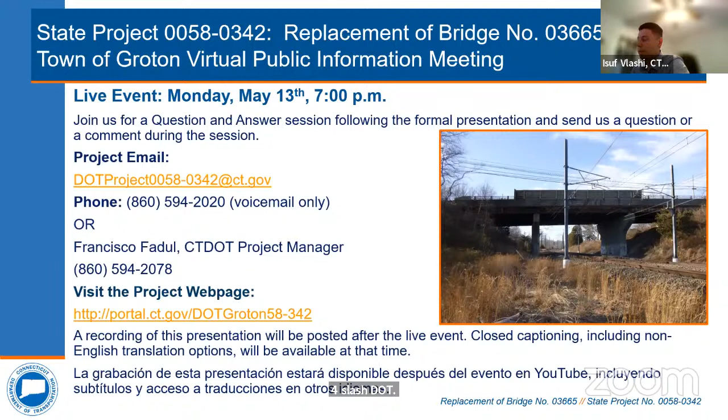Here we have the project team on the Connecticut Department of Transportation end. We have Bart Sweeney, the Division Chief of Bridges. We have Derek Lessard, the Principal Engineer, Consultant Bridge Design. Myself, Isuf Vlashi, the Project Engineer and Consultant Bridge Design, along with Francisco Fadul, Project Manager for the project and Consultant Bridge Design.

Here we have the Consultant Liaison Engineering team, along with the Designer of Record, WSP. For the CLE team, Rich Armstrong is the program manager over at GM2. Dennis Garceau is a project manager at GM2. Tom Wiley-Burt is the project director over at WSP, and Jodi Constant is the project manager over at WSP.

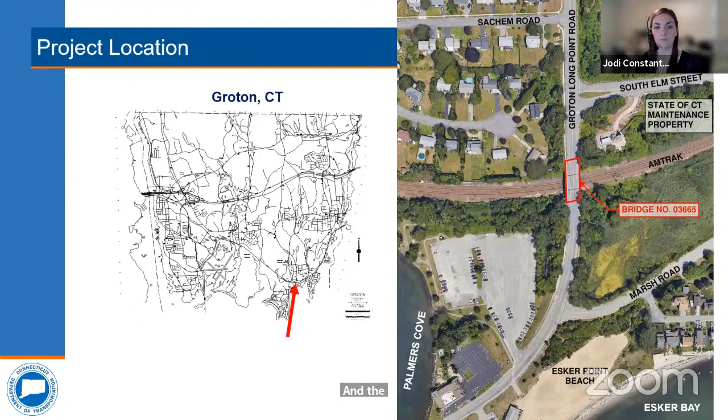Before we get into the details of the current conditions of the bridge, I want to quickly review some bridge terminology that's going to be used throughout the presentation.

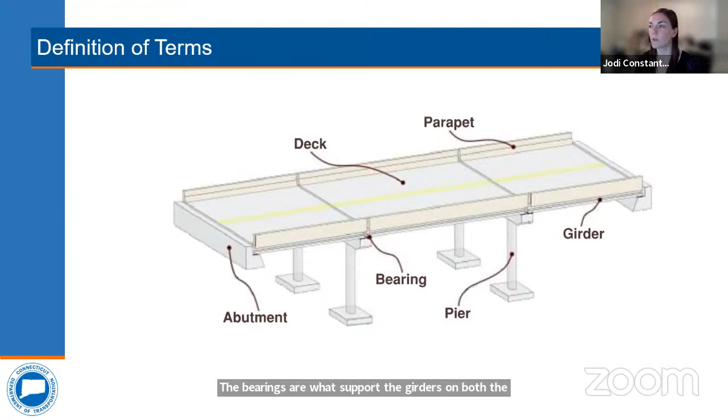The bearings are what support the girders on both the abutments and the piers. And then finally, the parapet is the concrete barrier that you typically see on the bridge.

The purpose of this project is to address the structural deficiencies of Bridge 3665. We have reviewed routine inspection reports over the last few years on this structure, as well as completed a site visit.

This confirmed all of these areas of deterioration. There are currently low condition ratings for the deck, the steel girders, and the bearings.

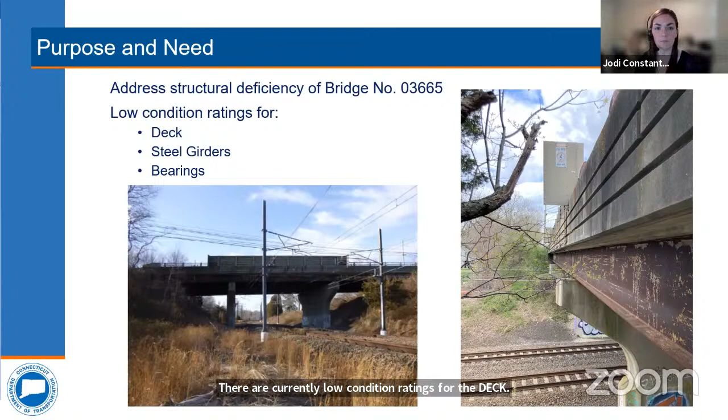So any repairs at this location are going to be invasive to the rail line below. It's going to require coordination with Amtrak and track outages to perform any construction over or adjacent to the tracks.

With that in mind, and considering the high level of deterioration observed on the bridge, a full bridge replacement was selected to address these structural deficiencies.

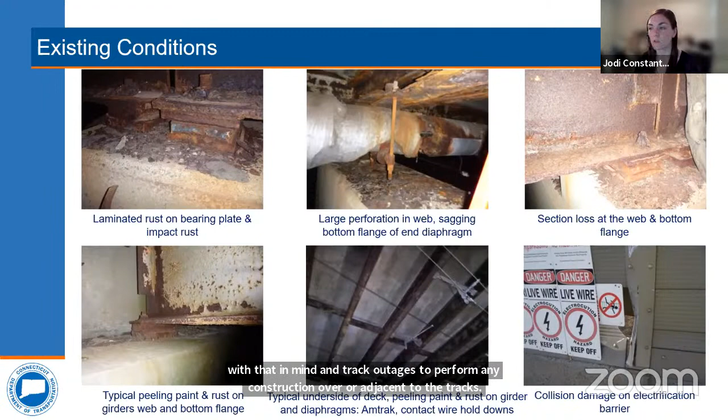Furthermore, as a result of CTDOT's Complete Streets Directive, which includes a focus on pedestrian and bicycle mobility, pavement markings are going to be added to Groton Long Point Road for an extended limit.

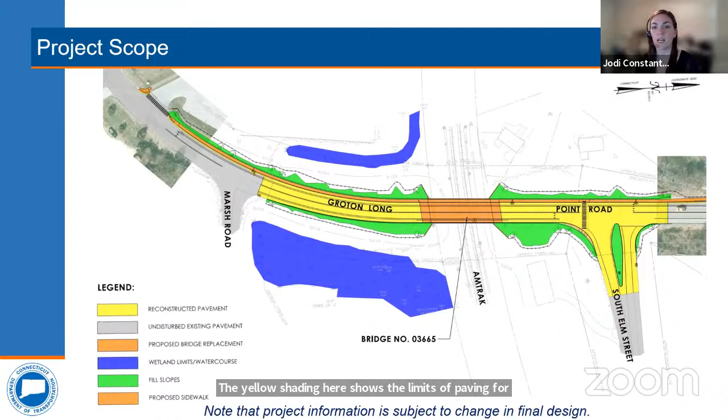So we can take a closer look at the bridge site itself. The yellow shading here shows the limits of paving for the project on either side of the bridge, as well as tying into the intersection with South Elm Street.

The limits of pavement replacement are really defined by a profile raise in the roadway, which I'll show on the next slide. The green shading here shows areas of disturbed soil that are going to be filled or raised higher than existing condition in the final condition.

Lastly, any blue areas shown are the existing wetlands adjacent to the site work, but we do not intend on disturbing any of these areas.

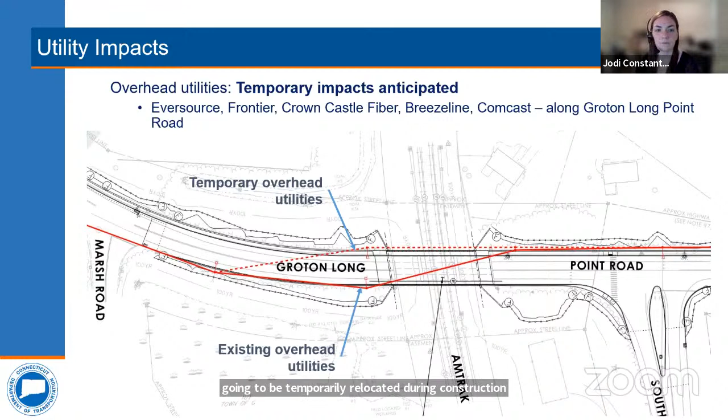For underground utilities, the only one present is the water main I mentioned, owned by Noank Fire District, running along Groton Long Point Road. We'll be permanently relocating it to the east side of the bridge, and details for this relocation will be developed further in final design.

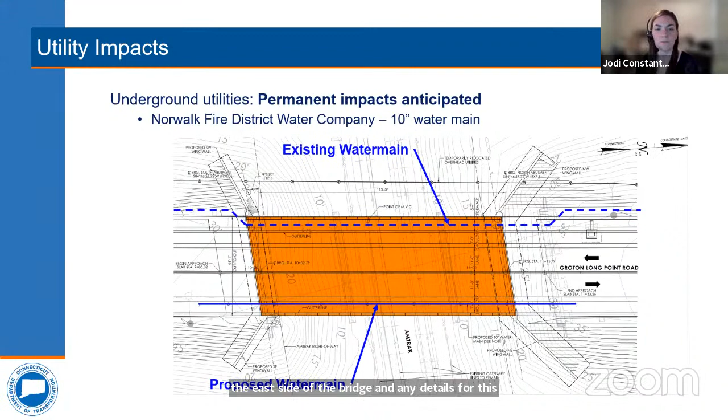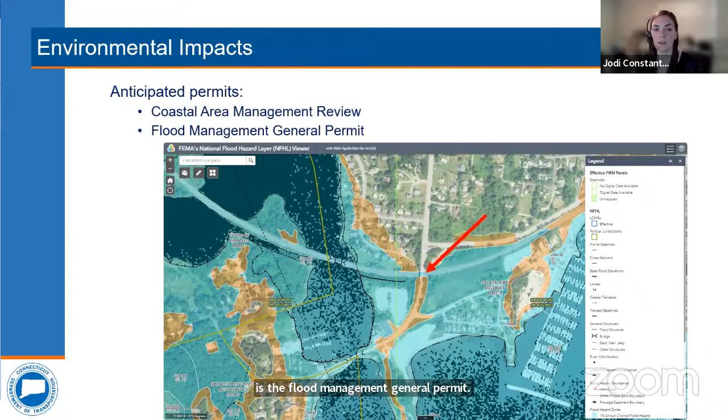Currently, there are no right-of-way impacts anticipated on private properties. This will be confirmed once we receive and compile the survey along the full limits of the sidewalk reconstruction. We do know, however, we'll have extensive coordination with Amtrak, the state of Connecticut, and the town of Groton for any construction activities on or adjacent to their properties, as well as the rail tracks.

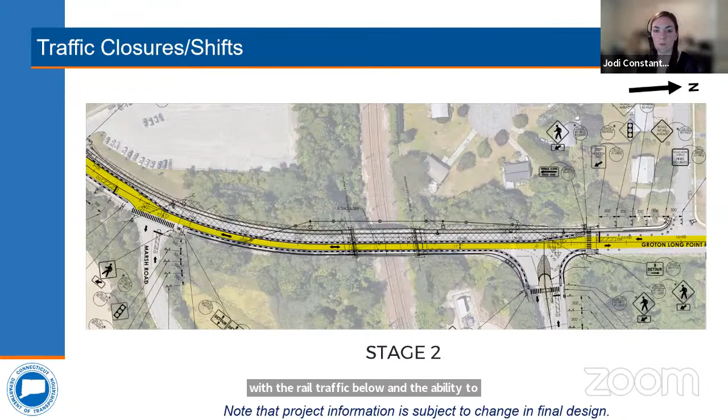During construction, the contractor will need an area to store vehicles and materials near the site. We are considering the use of the corner of the Esker Point Beach parking lot. This is a very convenient location with limited environmental impact since it's already a paved area, and that'll help keep costs down for the project. But the use of this area will be coordinated with the town as we move into final design.

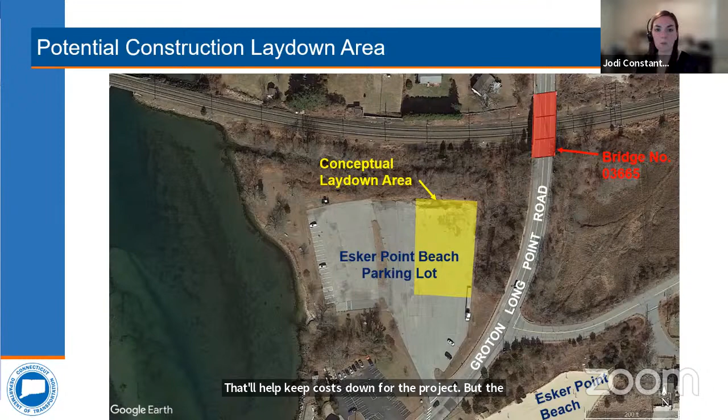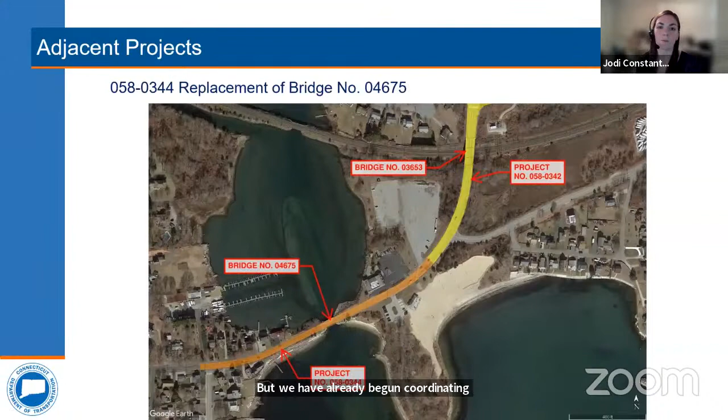We did want to note that there is an adjacent bridge replacement project, project 58344, which is the replacement of bridge number 4675. You may be aware of this project. There's already been some public outreach regarding it over the past few years. At this time, 58344 is in conceptual design. A new public info meeting can be expected this November 2024, where more information will come out regarding that project. But we have already begun coordinating with their project team to ensure these projects are completed without any conflicts with one another.

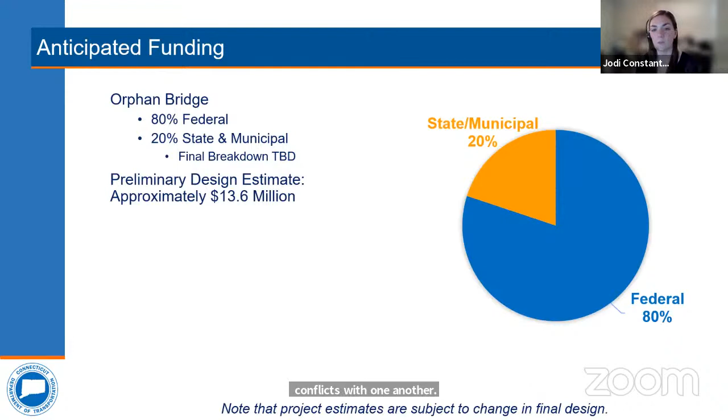The anticipated funding for the project is split between federal, state, and municipal funds. 80% of the funds will be federal, and the remaining 20% will be covered by state and municipal funds. The exact breakdown between state and municipal funding is still being determined at this time. That'll be completed as we go into final design, but the total cost estimate for the project is $13.6 million, and that is our preliminary estimate at this point.

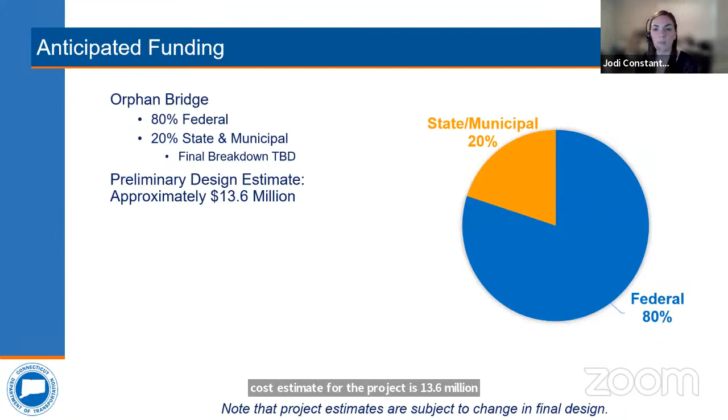All the information presented here today was developed through preliminary design, so we're about 30% through design for the project. We're going to continue developing the design and finalize it over the next two years, and put the project out to bid in the summer of 2026. The contractor will be awarded and active construction can be anticipated in the fall of 2026. The duration of construction is estimated to be two seasons, so activities would conclude in the fall of 2028.

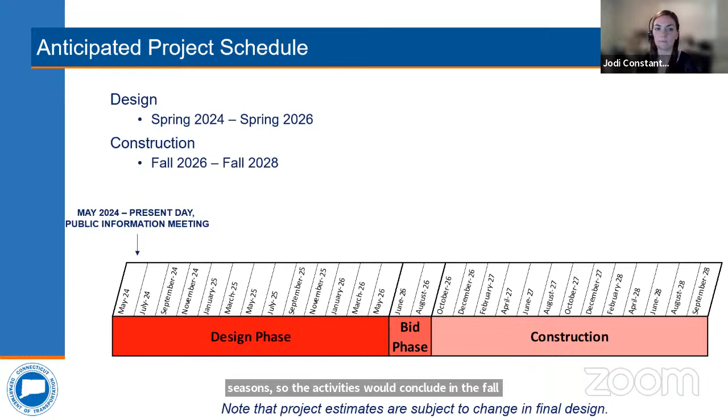So with that, I'd like to thank you for your time and attention. And I'm going to hand things over to Dennis, who's just going to review some of the Q&A protocol again.

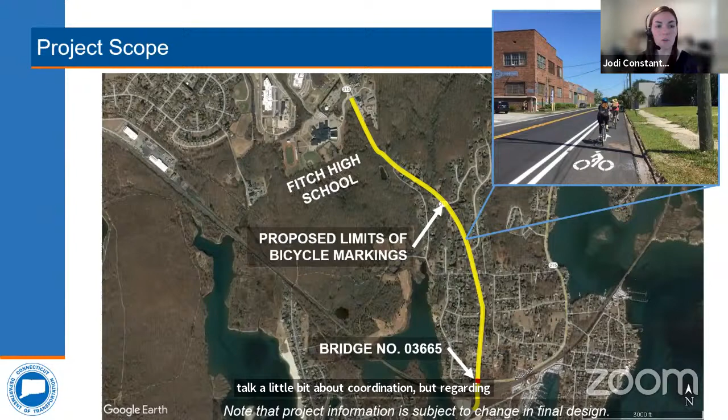Regarding the space for an additional track, the benefit of having our full replacement here and moving all of the substructures of the bridge outside of Amtrak's right of way is that it would give them more flexibility to add another track if needed. Additionally, because we're now going to be meeting the standard minimum vertical clearance, that eliminates obstructions down the road for them and meets their new standard, which is sought after at all new bridge replacements. So this could be an opportunity for them if needed, but at this time we don't know of any plans for an additional track.

As Jodi mentioned, I can add a little extra to that. We are coordinating the work effort and sharing the design plans through each phase, from preliminary design all the way through final design and contract bid documents, with Amtrak to get any feedback or input they have on the details, to make sure we're accommodating any appropriate requirements for Amtrak.

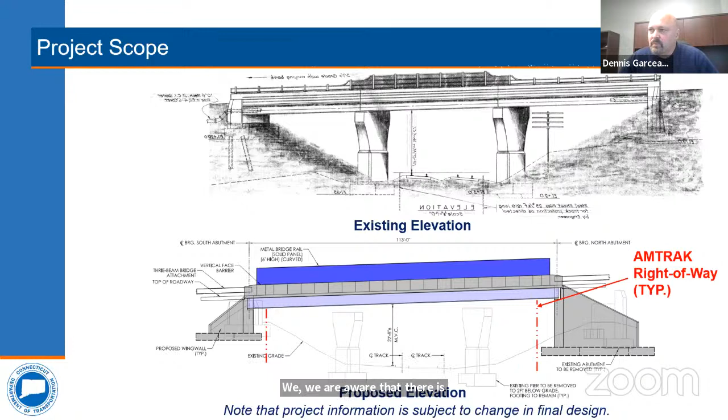I'll start answering the climate change question. We are aware that there is a floodplain within the vicinity of the project, and that the base flood elevation is about elevation 12. So that does inundate some of the tracks, a small limit of the tracks under the Bridge 3665 crossing. So that's going to be taken into consideration, and we'll be coordinating with Connecticut DOT on the permit process as far as what is required to address any climate change issues that may occur. If anyone else wants to add to that.

It was well said, Dennis. Is there any other questions at this time?

There's another question that came in. Is there any way of completing this project in a segmented fashion to have less traffic restriction occurring in the slower fall and winter seasons, versus potentially the busiest and most traveled summer and spring seasons, as it relates to all the abutting businesses?

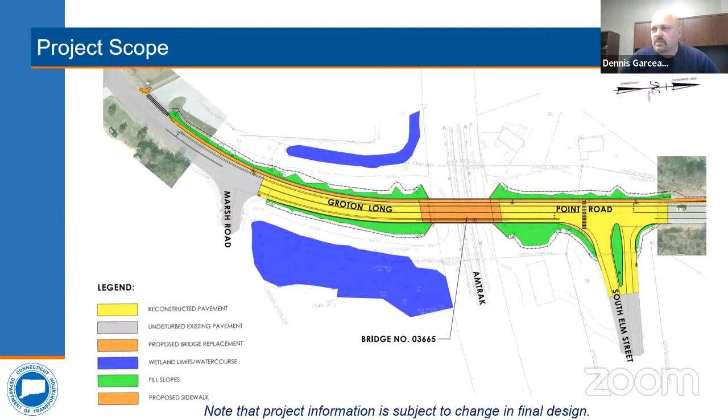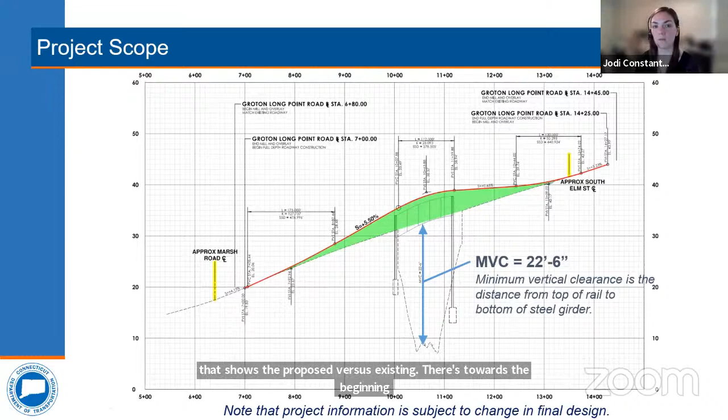I can add to that too as well, Jodi. If you want to share the cross section with the staging plans, or the slide that shows the proposed versus existing. There's towards the beginning... Profile? The cross section. Oh, I'm sorry. Yeah, right here, perfect.

Again, mentioning what Jodi was saying about the addition of the bike lanes and the Complete Streets Initiative, through that, as you can see, the existing cross section has pretty much 40 feet curb to curb currently, which accommodates two 12-foot lanes and two 8-foot shoulders. With the proposed bridge and accommodating the buffered bike lanes, we're actually going to reduce the lanes to 11 feet each, and the shoulders will be reduced as well. So by reducing the lanes, that should help with some of the speed issues that you're experiencing.

Is there any other questions anyone has? They have a question: it says, will you be speaking with the town concerning the outright congestion mess that could occur if the summer Thursday night concert series is allowed during the 2 summer seasons that construction impacts?

I can start answering that question. We have met with the town several times over the last few months, and are aware that there will be typically summer Thursday night concerts that we will need to be accommodating, and make sure that we're able to keep traffic flowing during those periods, especially on Thursday nights. Typically, we can also restrict the time that the contractor's doing the work on those days, possibly. Obviously, they don't typically work beyond a normal 5 p.m., typically on those nights. And if anyone needs to add anything to that I missed.

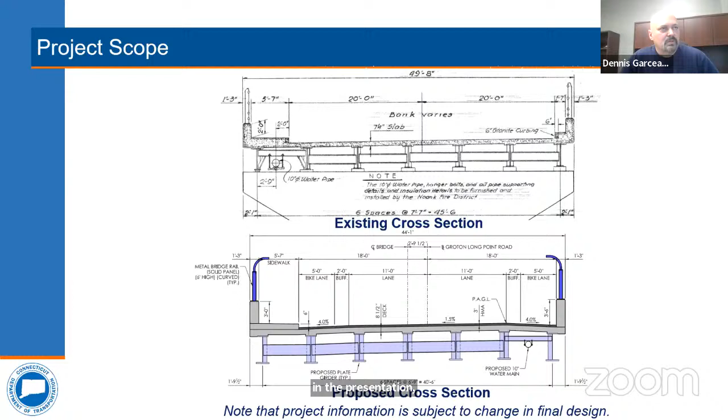Will this session be available as a recorded video? As mentioned earlier in the presentation, this is also going to be recorded on YouTube. So you'll be able to access the YouTube video at www.youtube.com. I also copied the link for the YouTube video in the chat, so you can cut and paste that after the meeting. So the answer to the question is yes, this will be recorded and there'll be access to that for the public.

There's also another question: children with training wheels will have issues with a 4% slope. I'll comment on that further. The 4% slope is over the 5-foot bike lane width, that's only 3 inches, so it is a minor cross slope in reality. I don't think it's really challenging for anyone to travel on it, and everything we design meets ADA requirements for cross slopes or longitudinal slopes put out in the field. So we don't see any challenges in terms of bike lane use with that cross slope, and again, it is the standard.